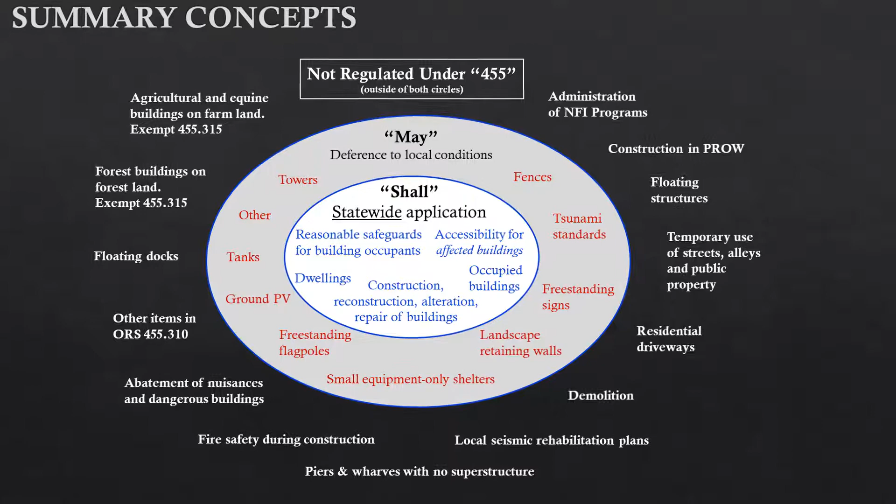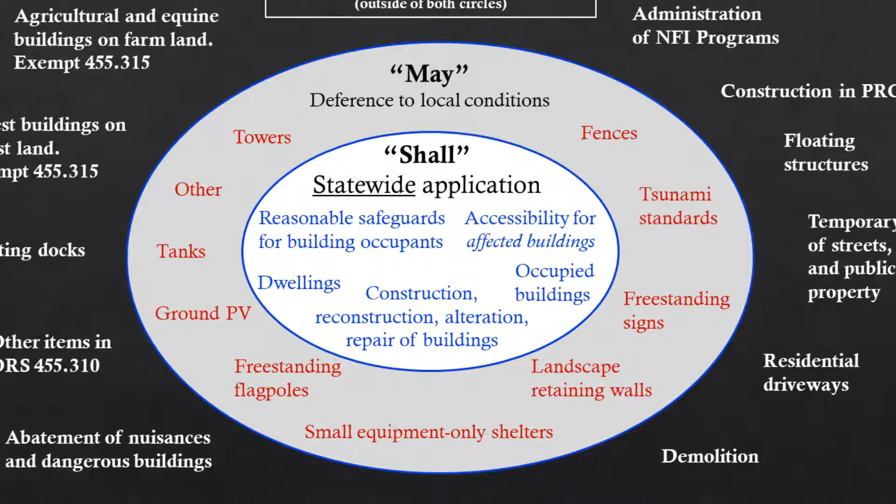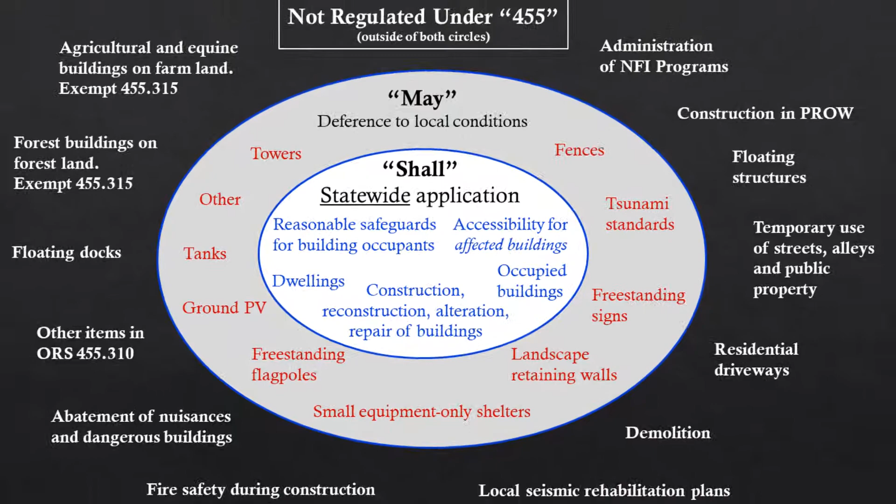When considering this scoping policy, the following illustrative figure may be helpful. Note the two ovals. In the center oval, there are examples of matters that apply statewide under the State Building Code. In the outer oval, we see examples of matters which are deferred to local policymakers for considering community-specific needs of additional regulation. Outside of both ovals are examples of matters completely outside the Division's delegable authority and not regulated by the State Building Code. We'll come back to this figure shortly after covering the next couple of slides, but I think it's helpful to take a quick look at it.

In applying the doctrine of occupied field, the intent of the legislature is presumed to be deference to local conditions, whether urban or rural. When the text of a preemption clause is susceptible to more than one plausible reading, the Division relies on the plain reading that establishes maximum flexibility. By drawing a distinction between the shall and may statements, the legislature has provided an opportunity for local delineation based on local conditions for those certain unoccupied structures.

It's important to note that both the shall and the may categories fall under the division's regulatory scheme. While providing for local delineation in the may category, all work identified in either of the two ovals on the following slide and that which we reviewed previously must comply with the respective construction standards of the State Building Code. Local policymakers review local conditions, and who better to make community-specific decisions? What's reasonable in Harney County may not be reasonable in the Portland metro area. Only local officials using that local knowledge can pragmatically apply the reasonable test of ORS 455.020 for these unoccupied structures.

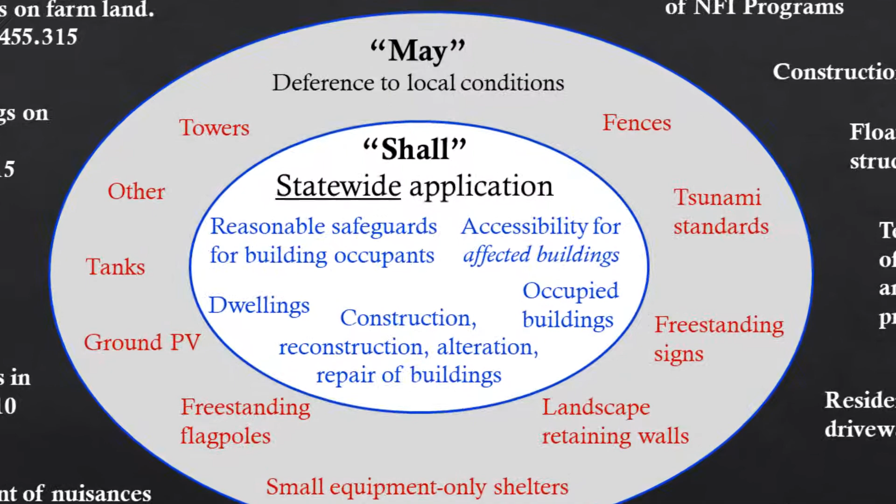To expand our review of this figure, let's note the following together. The two ovals shown fall under the division's authority. The shall oval, or the center oval, outlines examples of matters which are governed statewide under the State Building Code. This includes occupied buildings, reasonable safeguards for those building occupants, accessibility for affected buildings, as further defined in ORS 447, and any associated construction, reconstruction, alteration, or repair of buildings.

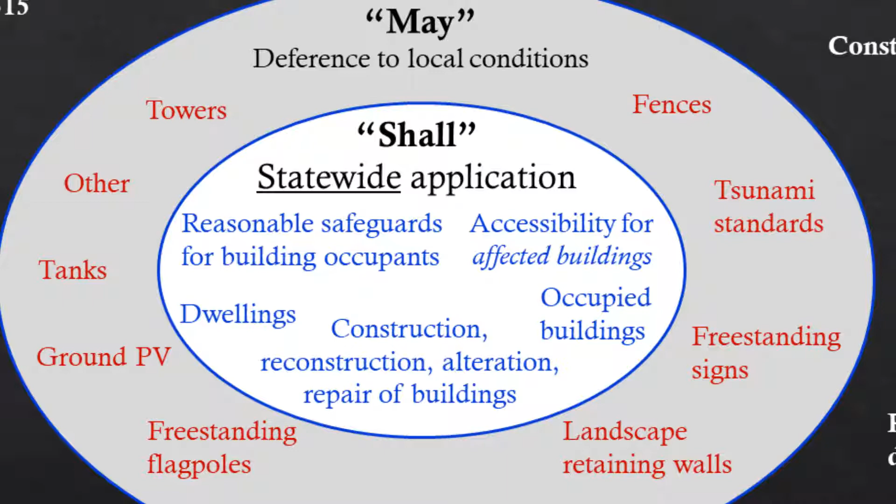The may oval, or the outer oval, lists matters which fall under the division's authority but are deferred to local policymakers. This includes historically low hazard and customarily non-occupied or non-occupiable structures, such as freestanding tanks, fences other than those required swimming pool barriers, freestanding flagpoles, landscaping retaining walls unrelated to buildings, and small equipment-only weather shelters.

Regulation of these items is deferred to local policymakers and elected officials, providing flexibility for them to address community-specific goals or needs through additional local regulation of one or more of these items. As we'll see in the associated code language, many of these items have guiding parameters that must be considered where additional local regulation is desired. We'll touch on that in more detail later in the presentation.

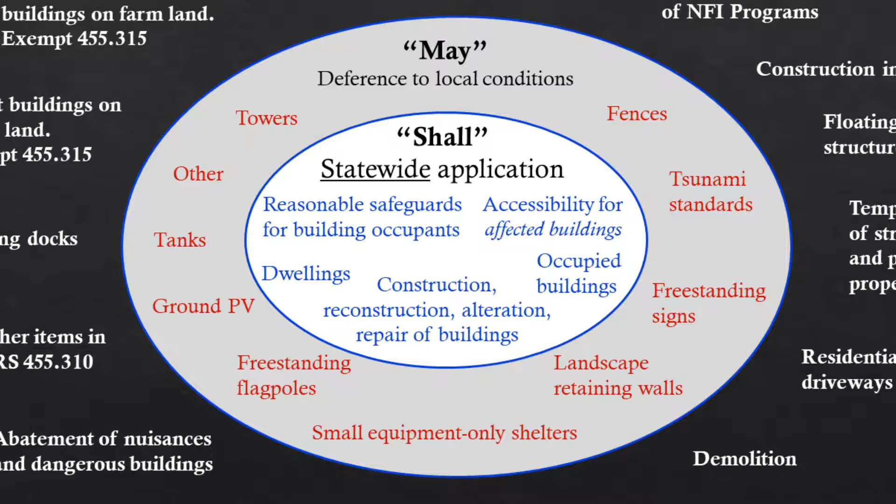The most important consideration here is that since both of the ovals fall under the division's authority, the applicable construction standards of the State Building Code will apply accordingly.

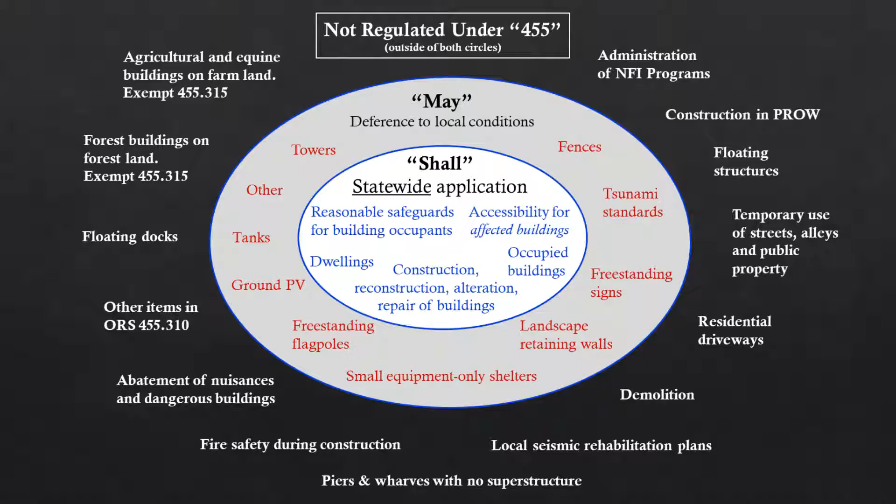Outside of both ovals, we see items falling completely outside the division's delegable authority. Authority for several of these items is specifically reserved for local government, such as the abatement of nuisances and dangerous buildings, local seismic rehabilitation plans and programs, and driveways. Any municipality may have independent local authority for other listed matters where not otherwise preempted, but any local authority would simply not be derived through our division's delegation of authority.

Delegable authority is an important and often overlooked consideration when analyzing the content of the State Building Code. While the advisory boards generally elect to follow nationally promulgated model codes, specifically the IBC and IRC, for creation of the OSSC and ORSC respectively, there is an ongoing effort to verify that any adopted model provisions fit within the division's regulatory paradigm.

For example, demolition is not encompassed by the division's authority, but is absolutely part of the national model. The same can be said for encroachments into the public right-of-way, fire safety during construction, grading unrelated to site construction standards or building foundations, and similar matters.

Where there is desire to regulate these matters locally, any local consideration should be determined in accordance with guidance from local legal counsel. Since the authority for these matters is not derived through division delegation, the provisions of the State Building Code are not mandatorily applicable, but may be referenced by the municipality voluntarily.

Nothing in the State Building Code limits a municipality's ability to enact or enforce its own ordinances, except where specifically preempted by the provisions of the code. The division is unable to deem any and all possible local ordinances as legally sufficient within Chapter 1, but has added clarifying language throughout the chapter to detail municipal ordinance allowance.

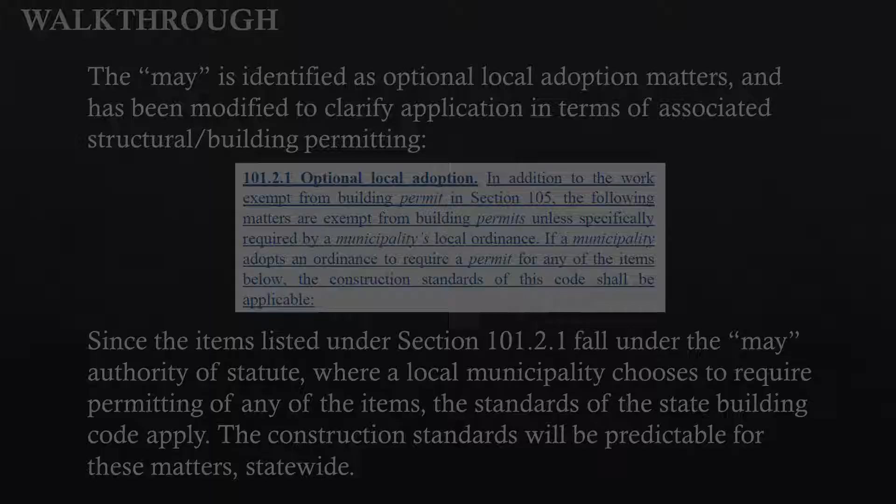The following subsection, 101.2.2, identifies those matters that do not fall under the authority delegated by the division. Some of these matters may be published in the National Model Code, and municipalities may have independent local authority to regulate one or more from the list where not otherwise preempted. It would simply be through independent local authority as further determined by local legal counsel.

Here's a closer look at those matters falling outside of our division's delegable authority. Again, this list is located in section 101.2.2 and includes local seismic rehabilitation plans, dangerous building ordinances, right-of-way encroachments, construction located in right-of-way, demolition, dams and levees, which are typically preempted by federal regulation, transitional housing accommodations, and mechanical equipment not specifically covered by the provisions of the State Building Code.

As we covered together previously, the State Building Code is unable to somehow deem any and all possible local ordinances as legally sufficient. Note the strikeout language here in the examples provided. Also note the additional language intending to clarify that broad local ordinance abilities exist, and that the State Building Code does not further limit those local ordinances beyond ORS 455.040.

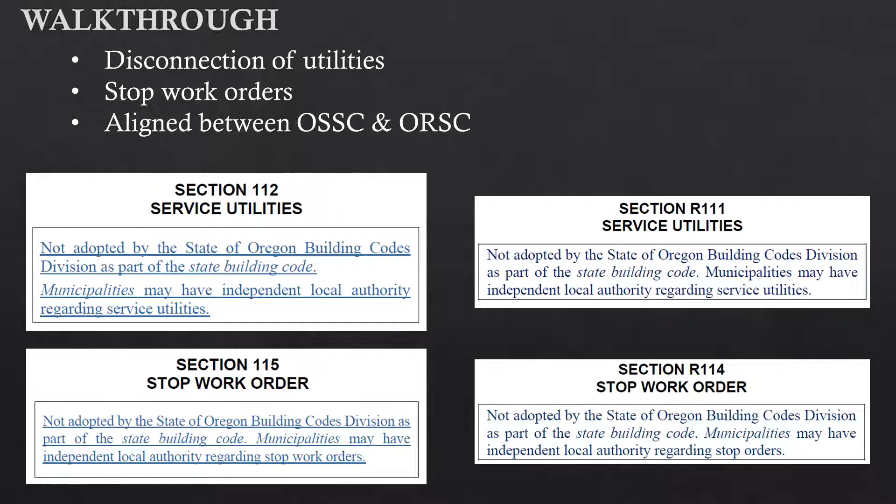Consistent with the broad and flexible discretionary authority afforded to the local building official, new language has been added throughout Chapter 1 to serve as a useful reference. This language was adjusted with input from OBOA and the City of Portland and is summarized as follows.

Any modifications permitted by the building official may not create an unsafe or dangerous condition regarding fire and life safety, and may not enforce requirements exceeding those prescribed by the State Building Code. As always, approval of an alternate method may include requirements outside those prescribed by the code, as agreed upon with the customer.

The key concept here is that fire and life safety is paramount. It's the entire basis and foundation of modern building codes since the early 1900s. There are other mandated requirements such as federal ADA standards that also serve as a baseline minimum.

Unrelated matters covered by the code such as convenience toilets, room areas, and similar may be considered under the local discretionary authority on a site-specific basis. As we know, the basic intent of the code can absolutely be achieved without adhering to the exact written word in all instances. And who better to consider achieving that than the local building official and their staff?

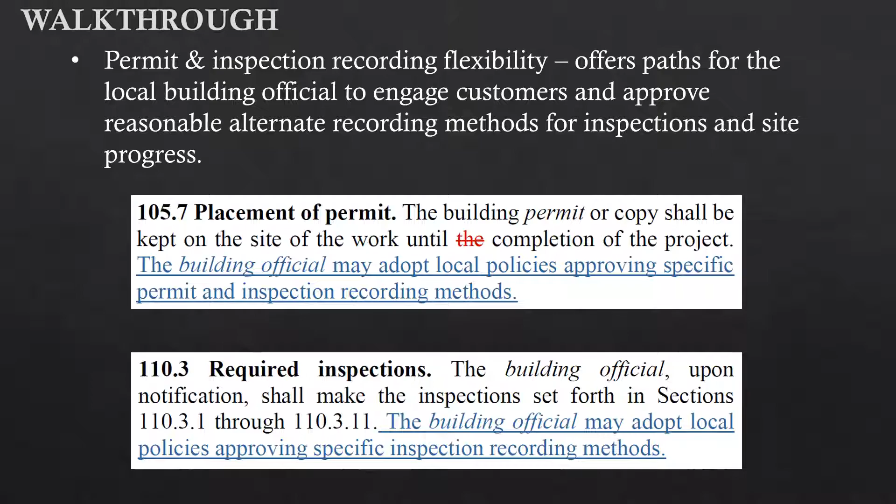In closing, here's a quick resource summary for you. Insert pages for the 2019 OSSC Chapter 1 Interim Amendment are available through our commercial program page. Chapter 1 of the 2021 ORSC is also available independently on the residential page, along with the full ORSC update training videos and supplemental documents. This includes a great 85-page document outlining all of the significant ORSC changes from each chapter.